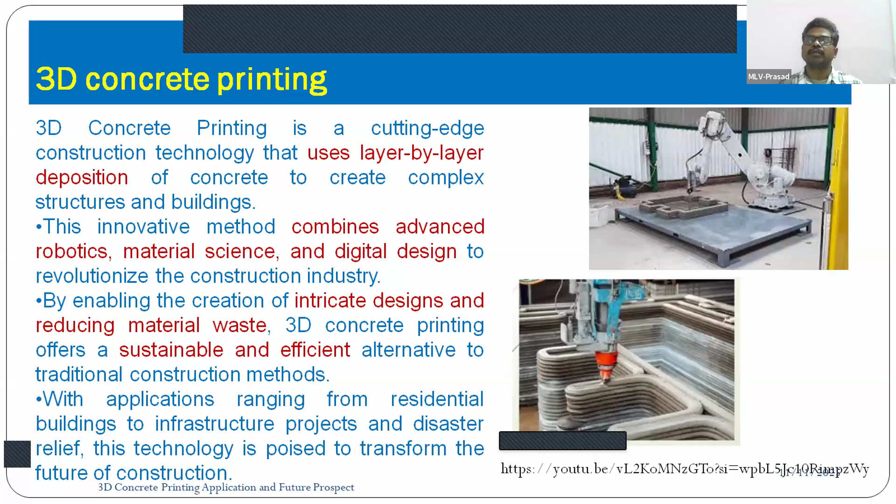Similarly, if you see, this is a panel actually. It may be a roof panel or it may be a wall panel like that. You can use this panel. So at different shapes, here I have given a column-like support. Then here, hollow partition walls. Even I can prepare them, because on this side I have given one layer, on that side I have given one layer, and in between I am making it hollow.

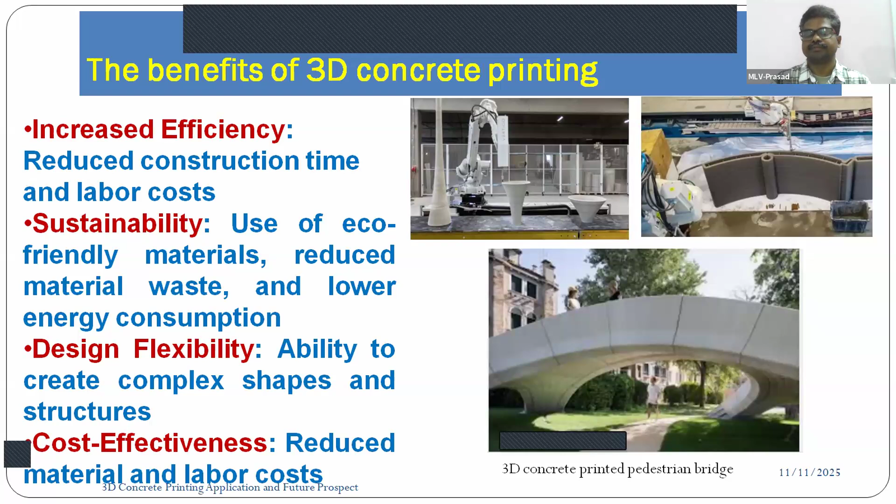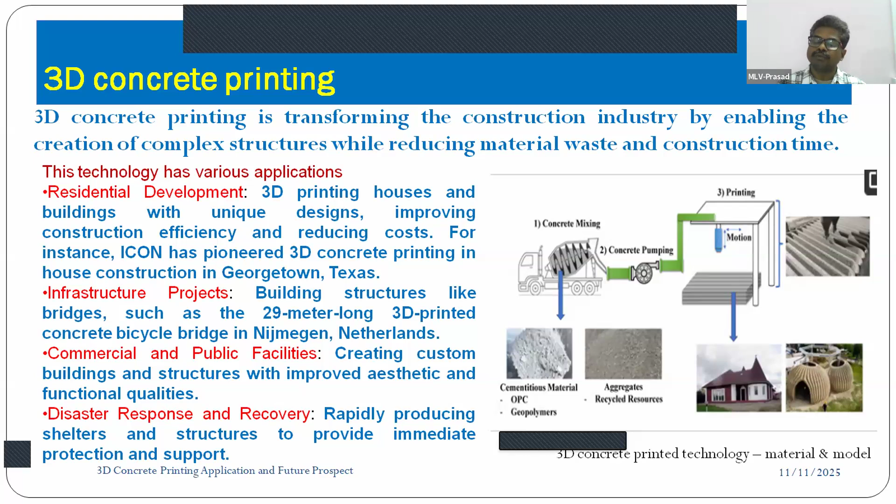Even in big infrastructure projects, here I am mentioning a 29-meter long 3D printed concrete bicycle bridge that was prepared, because research is still going on. We cannot simply go for heavy loads. Only pedestrian bridges or bicycle bridges like that are being done till now, but in future it will be applicable in any area.

And for developing this robotic technology, generally you take the help of your E&I and software, computer science friends. You take their help within your college only. No need to go for purchase.

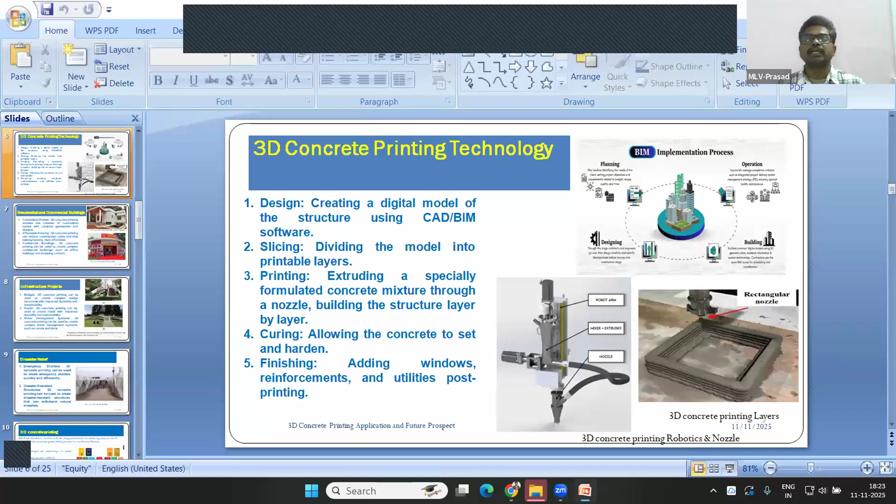So you people are following now? Yes, sir. Is it visible, sir? Yes, sir. No problem? Yes, sir, it is visible.

Okay. So, in between, if anyone wants to discuss anything, anytime you can stop. Particularly I am saying to the participants, if you want to discuss or have any idea, I will give sufficient time to you people. So come out with your doubts, okay? Because it should be two way actually. If only I am saying, and you are not saying anything, then I don't know whether you are following or not. So that's why.

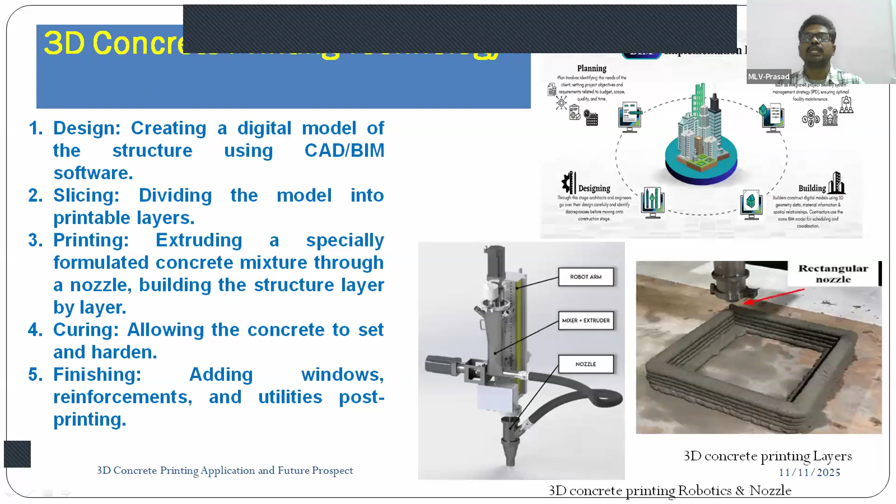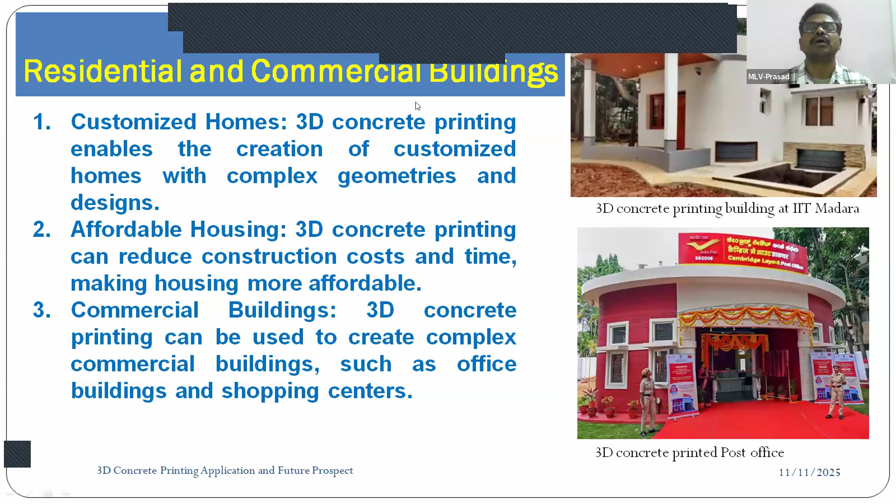Okay. And one more question, I think, they are asking here. Just wait. Research scope related to 3D concrete printing. This is a very good question, and there is a very high-end scope with respect to 3D concrete printing, because nowadays if you see review papers on 3D concrete printing, so many papers are coming. But particularly if you are preparing the additive from your end, and if you are able to develop a prototype model for laboratory purpose itself, because it is research oriented, definitely there is a scope to do the research.

And one of our friends is asking about these areas. Till now, in those areas no one has published with respect to 3D printed concrete microstructure analysis or durability studies. Only basic mechanical properties are going. So there is a lot of scope for the people who are working in this 3D concrete printing area. But you have to thoroughly go through the available literature, and you should be strong with soft computing skills and with the preparation of additive.

I am giving one example of geopolymer concrete. You can go with any other concrete also, which you feel is locally available. But you see that when I am going to prepare layer by layer, some properties are there based on shear, bending, twisting, then whether any cracks are going to be formed, because you have to give sufficient time to come from the fresh state to the hardened state. Before going to the hardened state itself, again we are going to give one more layer.

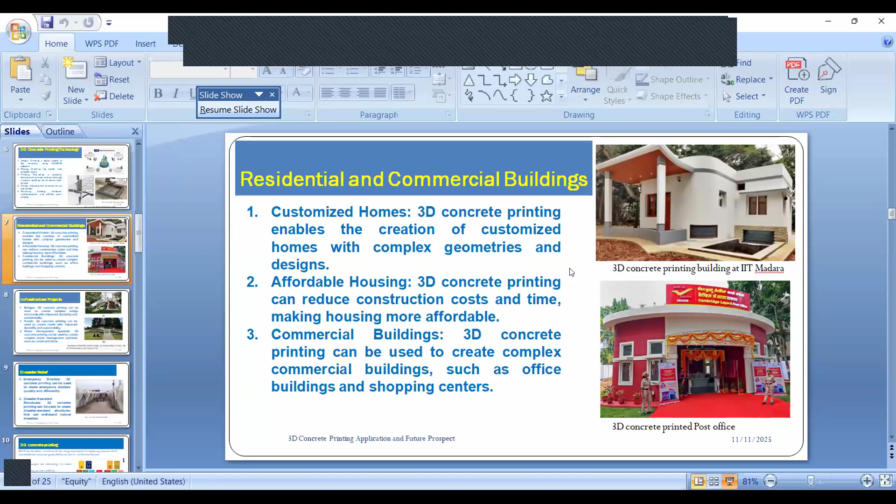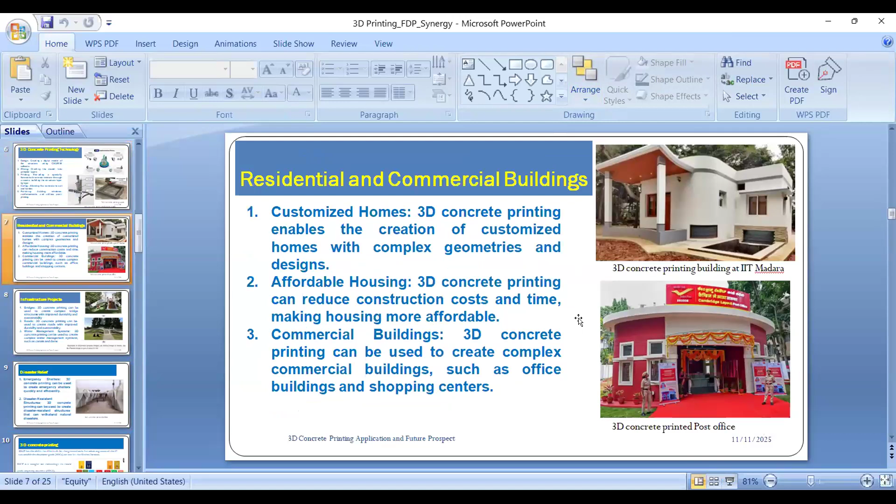See, there are, hello, hello, any problem? Oh, other slides are not connecting. Only one slide shows. One minute. Hello, sir. Please share other slides. Now it is sharing. Hello, now slides are sharing. Madam, now you are able to see the slide? Yes, sir, it's visible. Slides are visible? Yes. Okay, right.

Okay. So basically what I am saying is, if you are preparing a paste, the combination is different. If you are preparing a mortar, the combination is going to be different. And you have to maintain the binder to alkaline ratio. That is also different, because when it is a mortar, that much of a workability problem is not going to be there, so you can go for a higher binder to alkaline ratio. But when it is concrete, you want workability to be very good, because in concrete the coarse aggregate is also going to be added. So accordingly, you have to take the ratio.

Generally, if it is a paste or mortar, we can go with 0.3 to 0.35. But if it is concrete, the alkaline to binder ratio we generally use is 0.4 to 0.45. These things depend slightly upon what type of ash and slag you are using, and what activators you use: sodium hydroxide and sodium silicate, or potassium hydroxide and potassium silicate. You can prepare them in your laboratory, or ready-made solutions are also available. So it depends upon how you are going to prepare the ingredients.

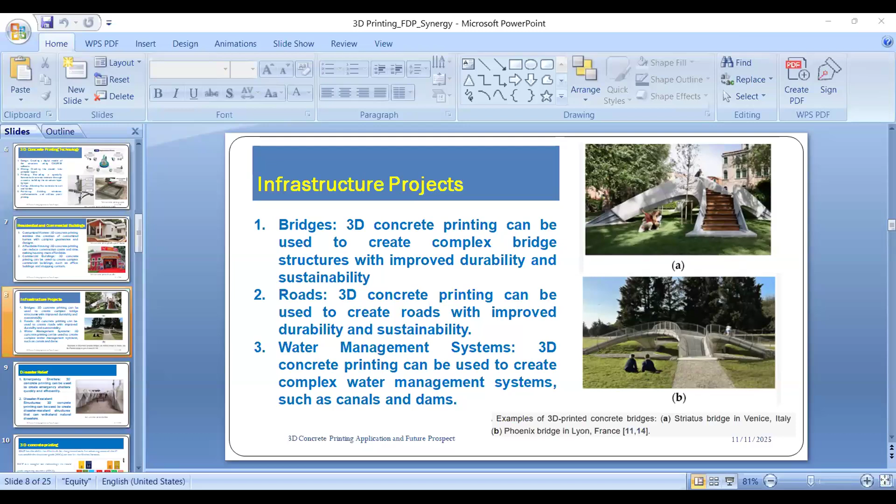then scaling. Excuse me, sir. Slides are not changing, sir. Hello. Slides are not changing. Now, yes. When I change them, they're changing. But till now, the same slide was there. Which slide was there till now? I can come back again.

You have seen all these slides. Yes. This one, the disaster slide, that is not there actually. One slide back, sir. This one. Yes. It's not actually changing as you go on. It's not changing actually. Okay. Now I am keeping like this only, and I am changing. Now it is changing, na? Yes, sir. So I am not going to the presentation mode. Simply I am keeping like this. You can see both the numbering of slides and the main slide also. No problem. I will keep like this.

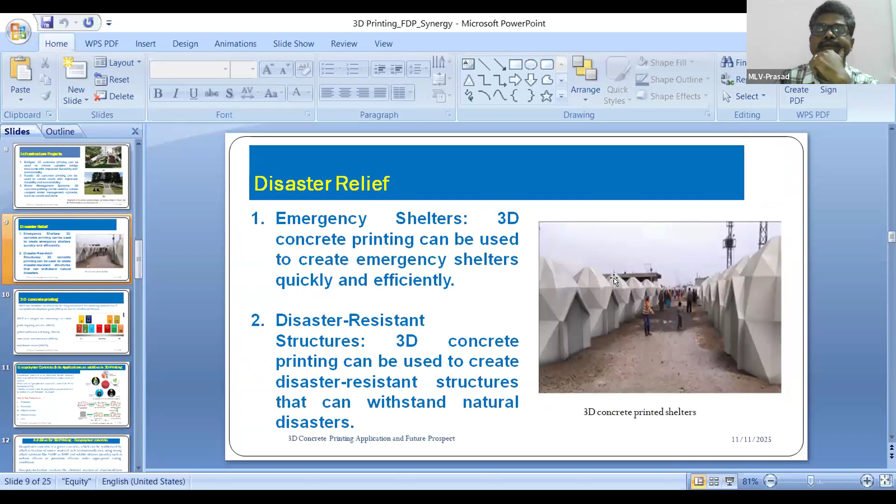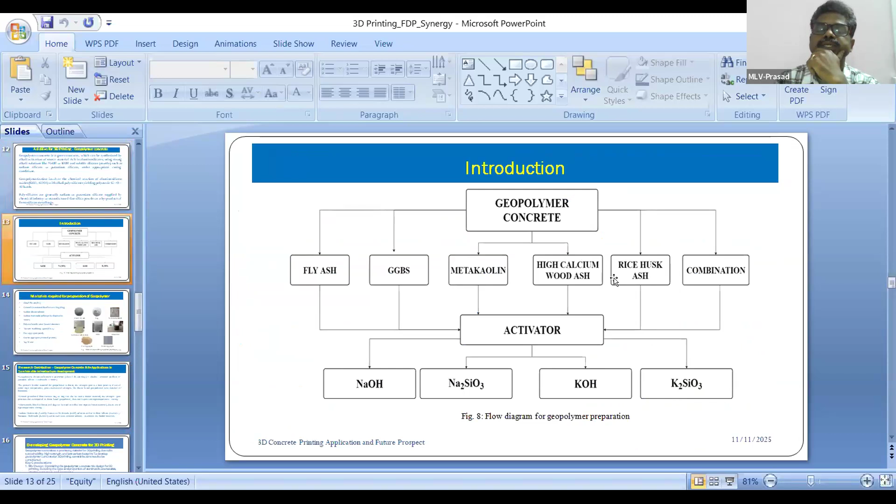We have already discussed these things, but these were not changing actually. So we thought that you are saying this without looking at the slide. Earlier they have not changed, na? You are thinking that I am just discussing. No, no. For each slide, based on that only I discussed actually. Okay, no problem. Now you are able to see these slides, na? Yes, sir. If you want, I will go back also. No, sir, not necessary. Just once I am going to show all the slides. If anyone is missing, just go through it.

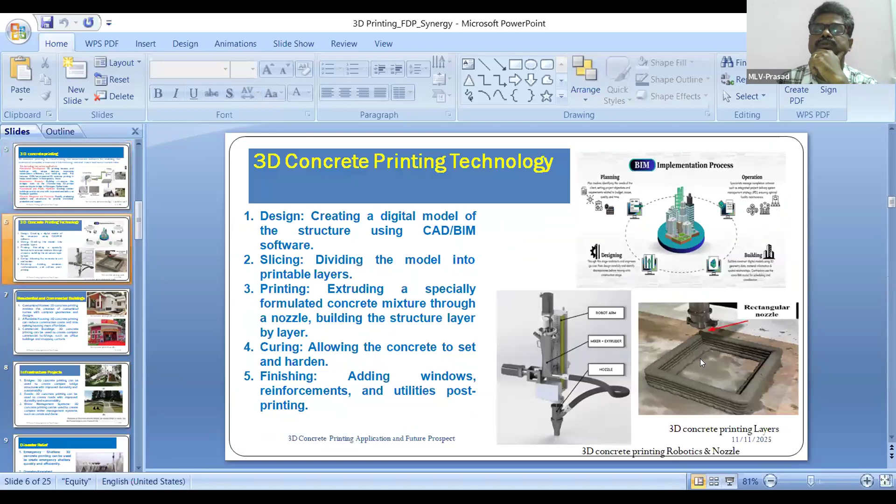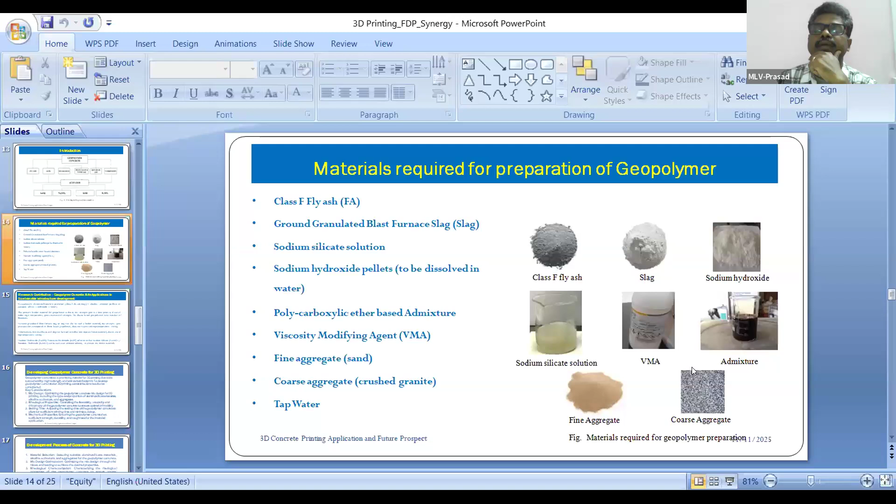And now we are discussing here. We are using all these types of materials. And as I already told you, here three things are there: whether it is a paste, a mortar, or a concrete. Sometimes for very small thickness layers or just for a decorative purpose, only paste can be used. Or sometimes we need some fine aggregate also; when the binder is mixed with fine aggregate, then it is called a mortar.

But the ratios go on changing depending on whether it is a paste or a mortar, because in flow studies, for paste the flow properties are different. For a mortar, the flow test is also different. For a concrete, the rheological or workability properties are different. These are the mix proportion, rheological properties, setting time and mechanical strength we have discussed. Then process of concrete for 3D printing: material selection, selecting suitable aluminosilicate material, alkaline activator and aggregate for geopolymer concrete.

Based on your requirement, whether it is a decorative purpose, a model, a concrete element, and in concrete also, whether it is a non-structural or a structural element, the limitations and preparation will have slight changes. Mix design optimization we have also discussed. Rheological characterization. Printing trials: you have to do many trials to evaluate the printability and performance of the geopolymer concrete. In a single trial you may not get it, because once you start printing, the flow should come continuously without any gaps. All these minimum precautions we have to take.

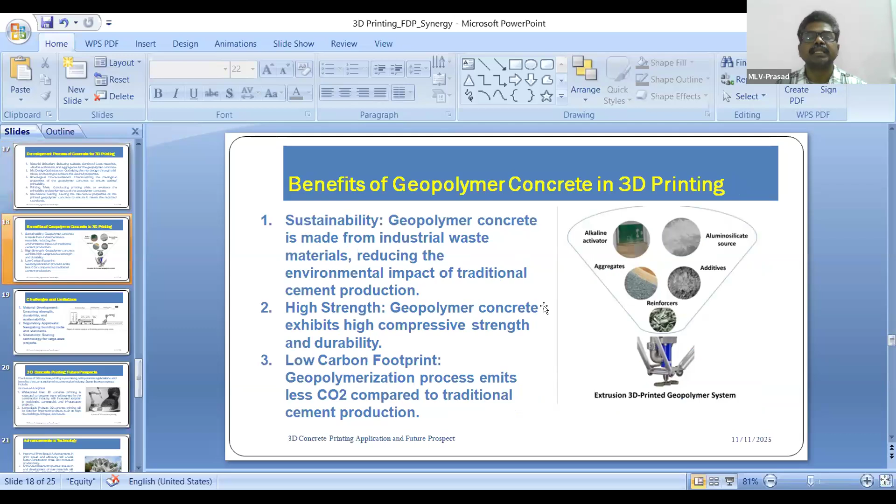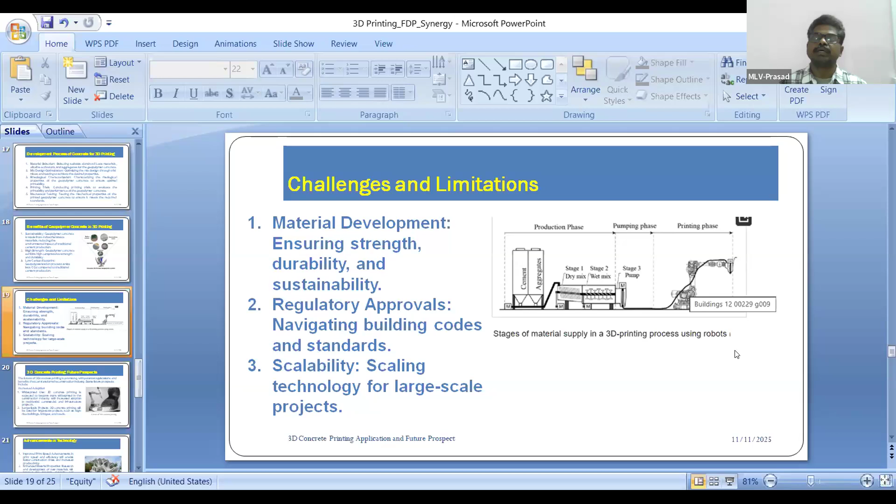The benefits of geopolymer concrete we have also seen: lower carbon footprint because CO2 emission is very less, high strength and sustainable. And these are the challenges and limitations, because it is finally connected to the pumping and printing phase, connected to the nozzle. Even if you are preparing in the laboratory, there is no need of automation or robotics. Simply manually you can make the layers for a trial purpose, and after that you can go for the robotics.

So future prospects. See here, when I am saying a future prospect, here you can see how this is 3D concrete printed in whatever shape you want. If you see, it is just like a mesh. Even a human being's face also you can create by using this latest technology. And even if you want to prepare it like a mesh, not a complete solid, then also it is possible.

All these combinations depend upon what the nozzle type is, and how much control is there in preparing this robotics technology, how you are going to handle this, and how much programming you are doing, because this is all the robotics part. This is coming to the nozzle and all that. Here we are going to connect this, we are going to give this additive from this nozzle only, and we are going to keep it.

Widespread use, see, increased application. 3D concrete printing is expected to become more widespread in the construction industry with increased adoption in residential, commercial, and infrastructure. Even large scale also you can do. So it is in the research now, but surely within 5 years, I can say it is going to come in the application state also.

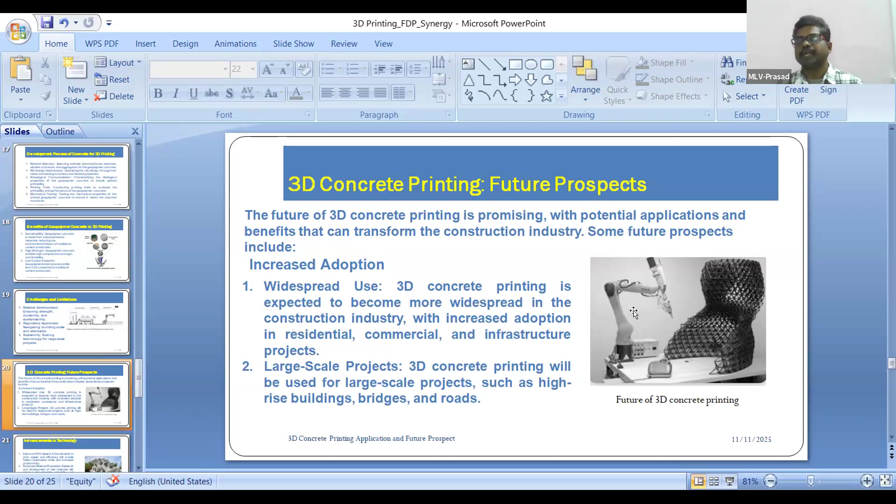you can connect this with the alternative sources, like how to use a solar system in this technology to operate this robotics. I can use solar panels, or I can use solar technology. Like that, you have to combine different things so that you will get the advancement of this.

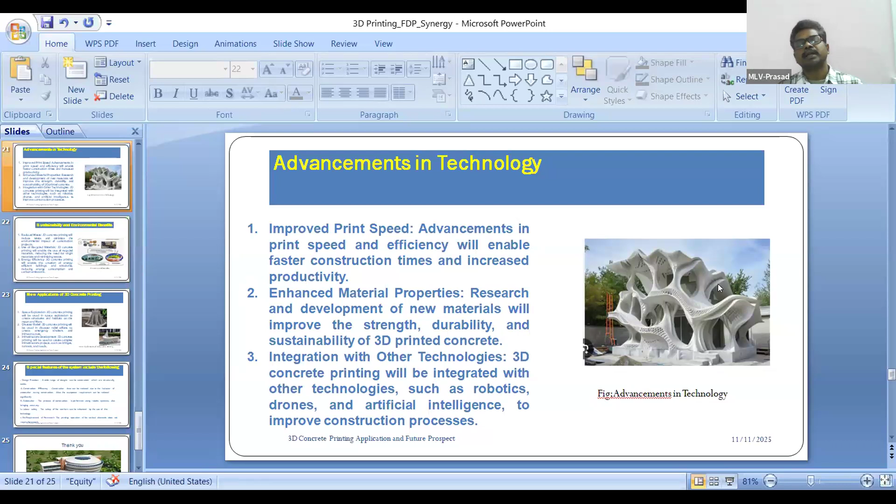See, now this advancement in technology, you see how different layers and how difficult. If you want to develop such a type of structure manually, it is impossible. But this is possible only with the help of 3D printing. This much complex structures or complex models also you can prepare with the improved print speed, enhanced material properties, and other technologies. By combining those, you can go for printing this.

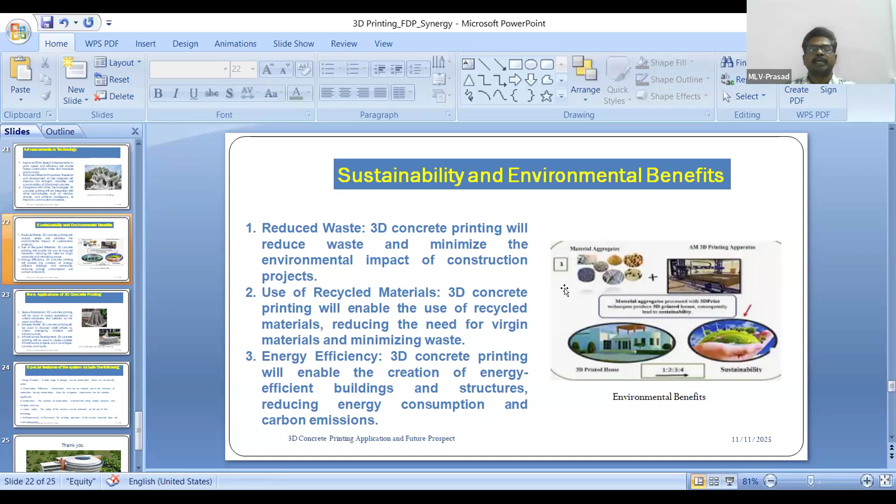So the sustainable and environmental benefits we have already discussed, why this is going to be very much useful. But what I am going to say is, for the additive in the initial stage, suppose you are not able to prepare the additive, ready-made additives are also available. You can purchase it and start with that. Otherwise, you start with the regular cement mortar itself. No need to go for geopolymer and all that. First get control on the layered concept, then on the studies on the layered concept. Then you can go for any new applications.

Okay. So special features of the system include the following. Design freedom. So this is the best advantage of this technology. Design freedom will be there. Construction efficiency is going to be very high when compared to regular concrete. And automation: let us say you have prepared one model and you want the same 100 numbers. Because it is automation, within a fraction of seconds, if you give the command and your additive is ready, you should be ready with that.

For it, it is just like taking a Xerox. Making a duplicate copy is very simple for it. First, once you are satisfied with the main model, then getting the automated numbers by using the robotics is very easy. And labor safety, because here everything you are going to do is in a controlled manner only.

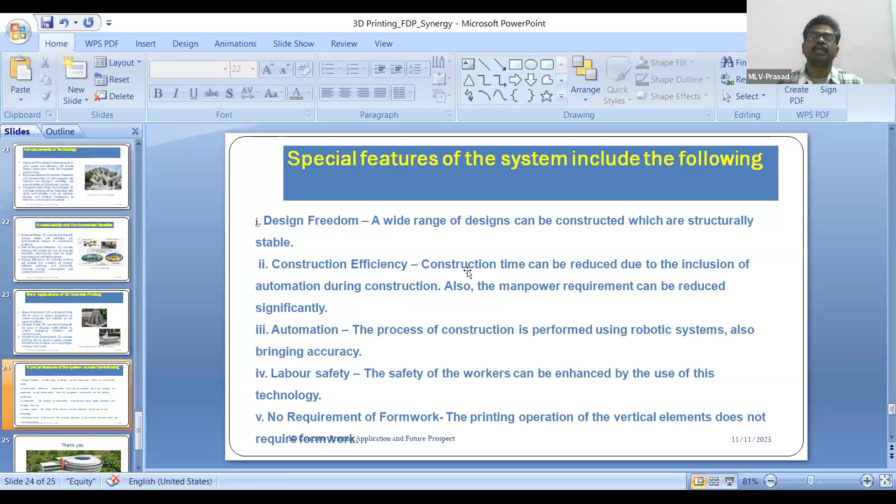Obviously, there will be labor safety, and only a very small number of laborers are required, and no need of any formwork, because we are building layer by layer, so there is no need of any formwork, and simply you can go for constructing it. Okay, so this is the overall idea of 3D concrete printing.

Frankly speaking, I am also working on this, and two research scholars are working on this 3D concrete printing, and we are developing the laboratory model also. We have developed a small laboratory setup, a 1 meter by 1 meter one and a 2 meter by 2 meter one. Initially we have done manual layers. Now we are trying to replace that manual work with robotics.

We are connecting it to a system, and through this system, first we are trying to move it in regular shapes only, just horizontal, vertical, in all three directions: X direction, Y direction, and Z direction. Trying to move it for regular rectangular or square shapes only now. Once we succeed in that, we will go for the different curved shapes. So slowly you have to improve your technology, and you will succeed.